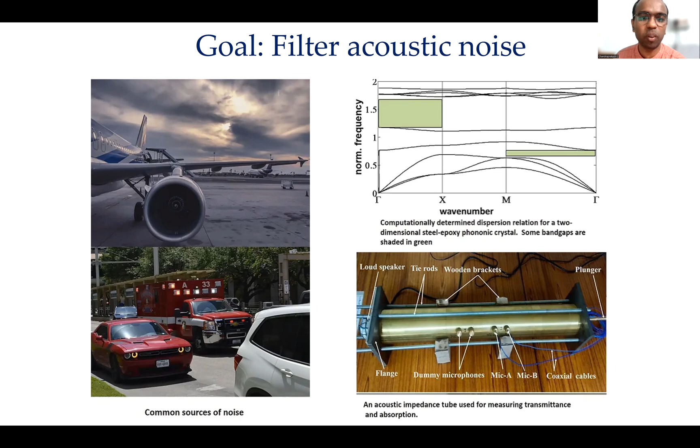There are two ways in which people do this: one is metamaterials and the other is materials. I'll try to show what are all the problems that we have been solving.

The first thing is, you all heard of the Doppler effect, which is when you have a moving sound source, or when the receiver is moving in the presence of a sound field, you notice a shift in frequency and so on. Now we do something very similar, where there is a speaker and there is wind. The wind could be going along a particular direction, or it could be a swirling circular motion kind of thing. We would like to see how the sound is perceived, how the propagation is being altered.

So we're going to examine how the sound propagates and attenuates in the presence of a fan. I am speaking and there's a fan next to me; you will hear it differently, or the person in front of me, or the person sitting at 60 degrees with respect to the normal will hear it in a different way. So that is what we're going to explain.

It involves very standard acoustics, and the work will largely involve programming and basic acoustics. So it's a very simple problem, worth trying as part of a PhD program, a PhD thesis, or a significant part of an MTech thesis.

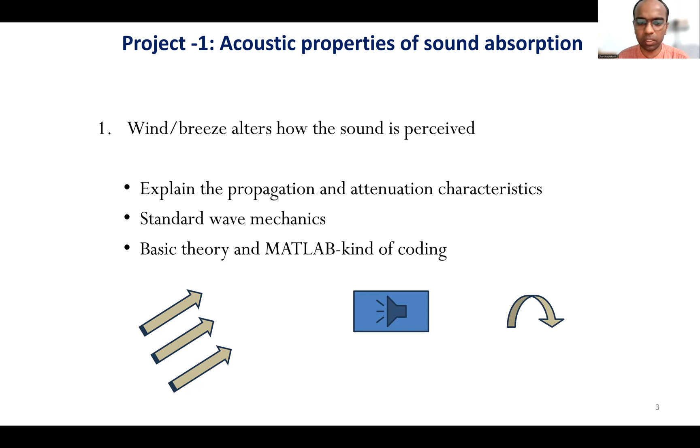That's the first one. These days there are sound absorbing or noise insulation materials which are made of petroleum. For example, the sponges inside a couch or sofa also absorb sound, just that they are made from petroleum byproducts. We would like to make use of biodegradable materials, which when I put them in the soil, they just degrade and become part of the soil. So we have been using agricultural waste to make these kinds of foams, which have been quite good in absorbing sound.

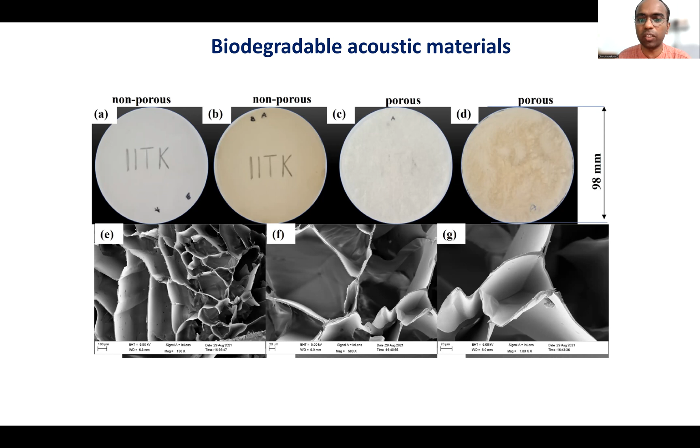So the next material that we have in mind is Kenaf, which actually looks like cotton. We have the material, we also have the procedure to make those foams, and we also have the instrument that can measure the properties. And of course, we don't do blind measurements -- we will be explaining as part of it.

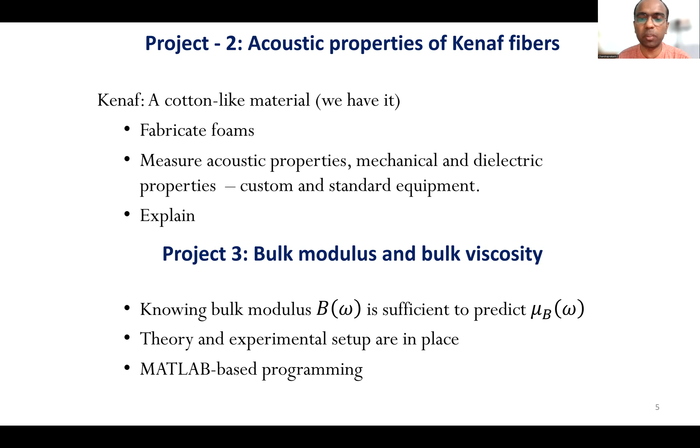Likewise, the parallel project that we have is: given a fluid, if we are able to measure bulk modulus as a function of frequency, the idea is to predict bulk viscosity also using the same data. So if you measure one, you don't need to measure the other, and vice versa. This is something in which we have already made some strides, so the work may largely revolve around programming and a bit of experiments. Again, these are all small topics that I'm listing, so that you can pick and choose a specific problem that interests you.

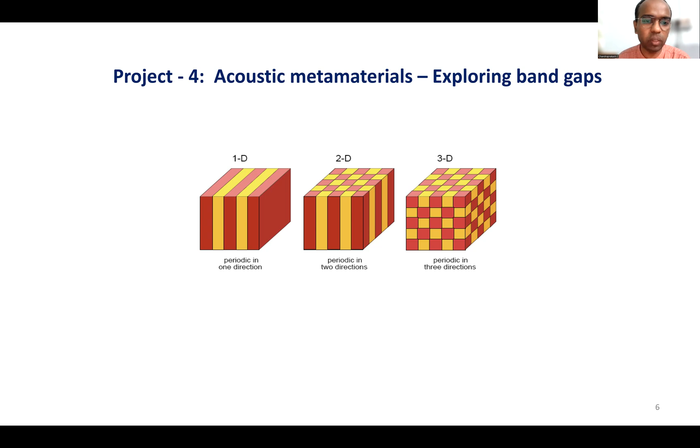The other thing the lab has been doing -- I'm not going to detail very much here -- is, what you see is a bunch of periodic one-dimensional, two-dimensional, and three-dimensionally arranged periodic materials. The waves or sound, or the elastic waves that propagate through them, have specific characteristics. I will not delve deep into it, but those interested can look up what are called phononic crystals. Here we like to do some kind of an inverse problem, so this topic will largely be on programming. This is roughly the set of 4 to 5 problems in acoustic materials or metamaterials.

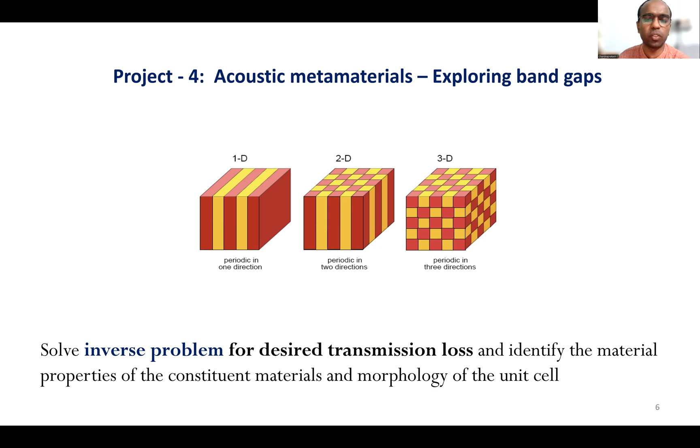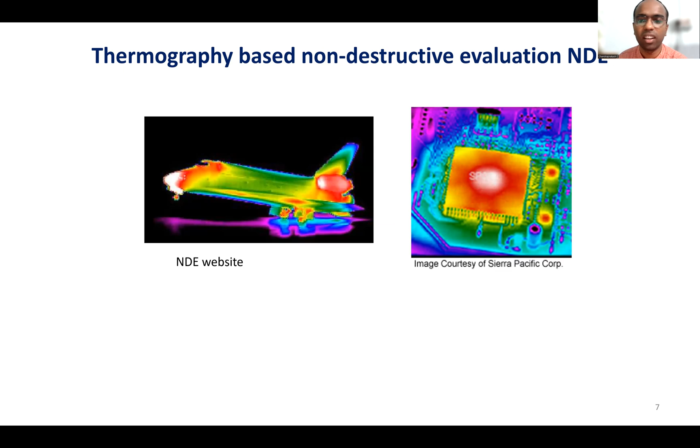The second line of work that we do is in thermography, or thermal non-destructive evaluation. As some of you may notice, these are not the usual images; these are taken from what is called a thermal camera. The red regions indicate that they are thermally hot, and the blue or purple regions indicate that they are relatively cooler. We do have one such camera.

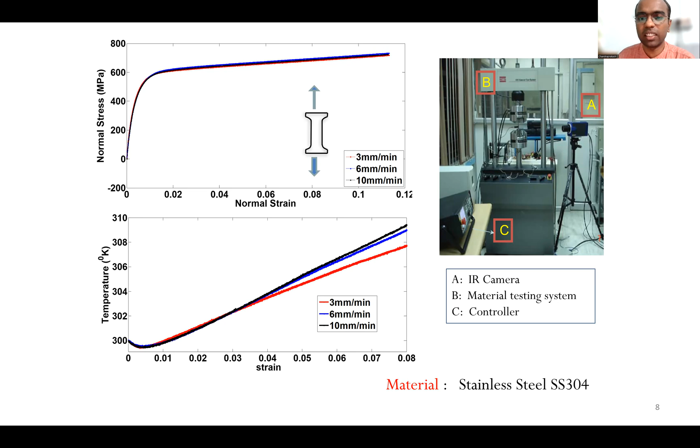One such explanation is something we have done, explaining why the elastic regime reduces temperature and why the plastic regime heats up. Likewise, we've done something similar for fatigue, and we were able to use some basic phenomenological models to explain it.

So that's done. Then we moved into springs. We've done something called wire ropes, which are basically heavy duty cables used in dams, cranes, or even electrical wires. We have done such advanced experiments.

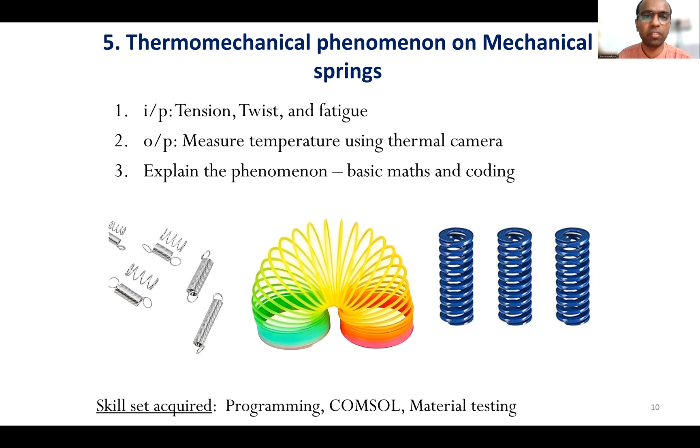Another project of interest to many labs and industries: you see the wall in front of you, the floor, the desk, the door. Can I measure thermal properties like thermal conductivity, specific heat capacity, coefficient of thermal expansion without actually cutting that material and taking it to a lab with specific equipment? We don't want to cut it, we want to measure it on the spot.

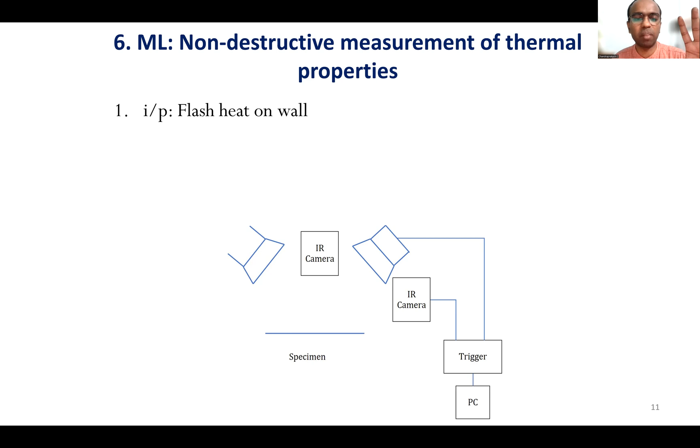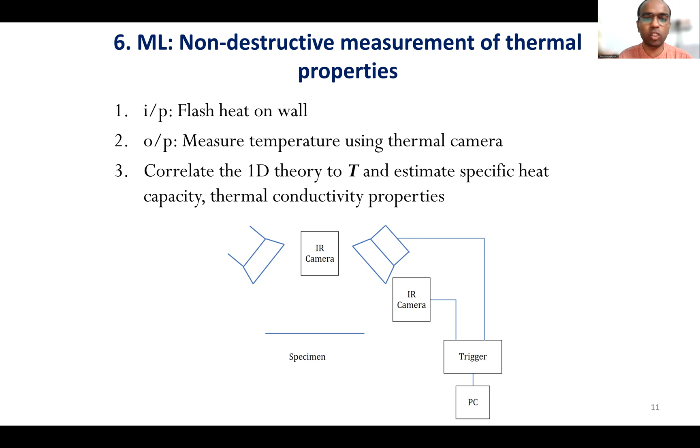So the way we do it is we give it some heat, measure using a thermal camera, and acquire the data. Either you do traditional optimization using analytical methods, or you're welcome to jump into artificial intelligence based methods. Either way, there's scope to work through this problem.

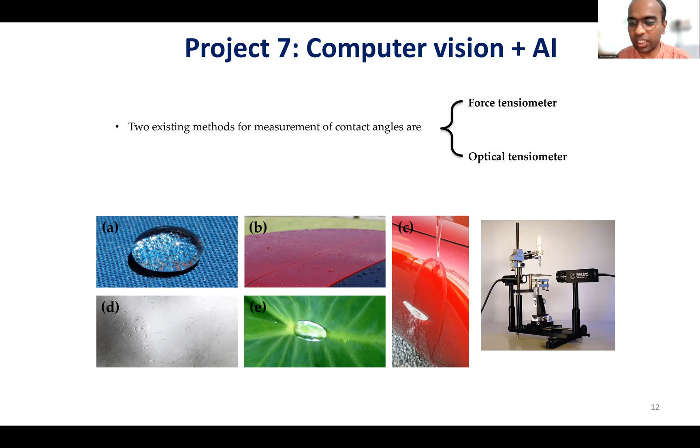One of my previous students showed how you do it on a commercial instrument. We purchased a smartphone and a small lens, which cost about 1500 rupees. The left hand side is what we were able to predict using deep learning, and the right hand side is what you measured conventionally. We had reasonable accuracy.

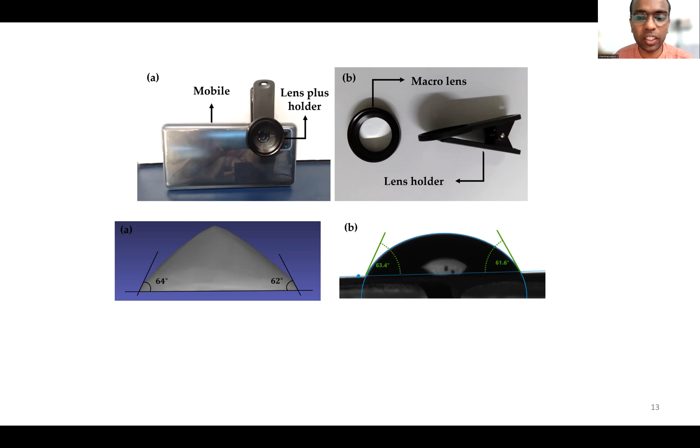Now we have done it on flat substrates, and we want to do it on curved surfaces. That is the problem here. This problem involves a lot of programming, whether you want to do deep learning or a physics based approach, your interest should be inclined toward a lot of programming.

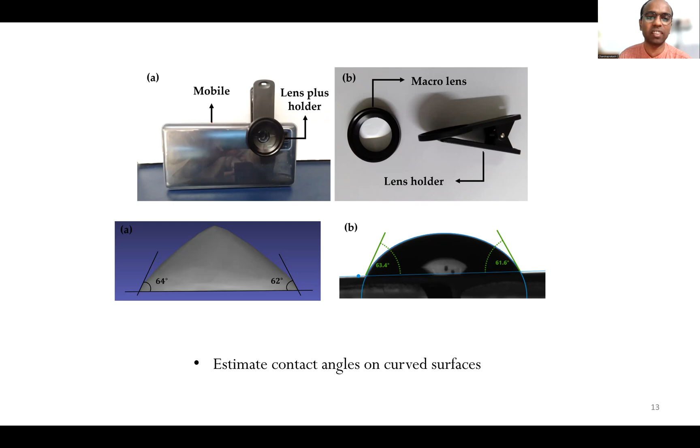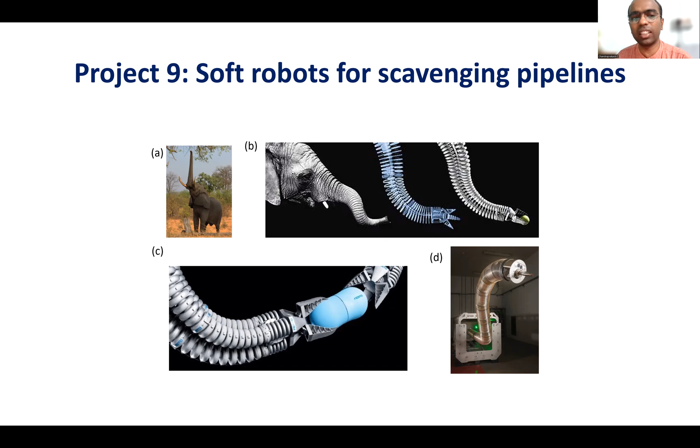The other thing we had success with is soft robots. Please visit my website, it's from the mechanical engineering faculty, there's a link to my personal homepage. On the front page there is a video of about 4 minutes. Please visit that, and if you're interested, we can continue discussing this.

So largely, the lab now has about 3 kinds of functional equipment, with one more being built, and we also have computers and standard software one would like to use. The work so far has been catered toward fundamental and applied problems, and there is always freedom to choose what kind of problem you want to work on, whether fundamental or applied, or a combination of theory, computation, and experiments. Either way is fine.

The good part is, so far to date, all my students have been placed. The students who worked in the lab have done a fantastic job, and all of them got placed in the companies or labs where they wanted to get placed.